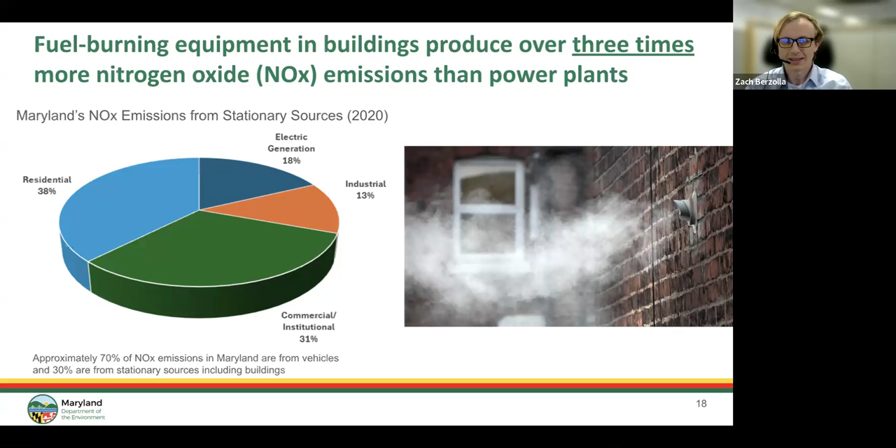NOx and other forms of air pollution from fuel burning equipment harms children and adults in many different ways. There are respiratory issues, wheezing and coughing, shortness of breath, asthma attacks, lung cancer, and other really significant health impacts like premature death, susceptibility to infections, metabolic disorders, preterm births, etc. These are all substantial health impacts, and Maryland is required to reduce criteria pollutants to meet increasingly stringent air quality standards and protect the public's health. This is something we think about a lot every day.

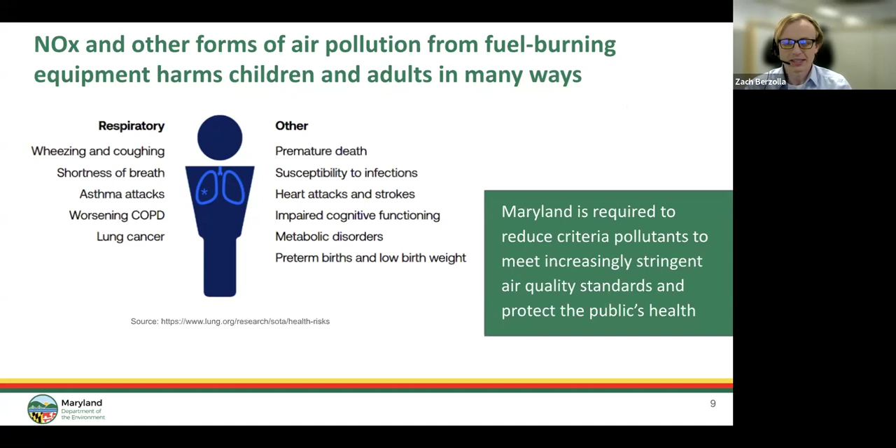This is one of the reasons why Governor Moore issued an executive order last summer requiring the Maryland Department of the Environment to propose the clean heat rules. That said, to propose a zero emissions heating equipment standard regulation that will phase in zero emission standards for heating equipment to reduce carbon pollution and improve air quality inside Maryland's homes and the ambient air, and propose a clean heat standard regulation to expand Maryland's renewable portfolio standard to the thermal energy system, mobilizing investment in clean heat solutions for homes and businesses. The ultimate goal here is to drive investment in clean heat technologies for Maryland buildings to reduce air and climate pollution.

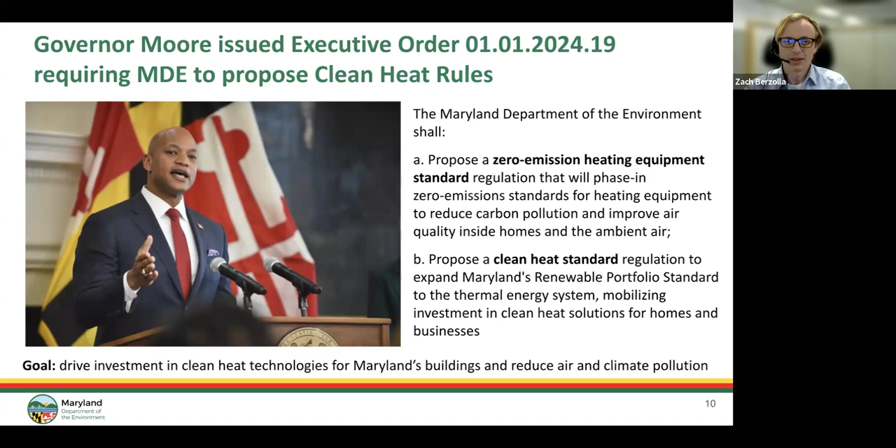I'm going to talk a little bit more about those 2 policies that we're developing right now. The first is the zero emission heating equipment standard. It establishes emissions limits on residential scale space heating and water heating equipment and helps people save money.

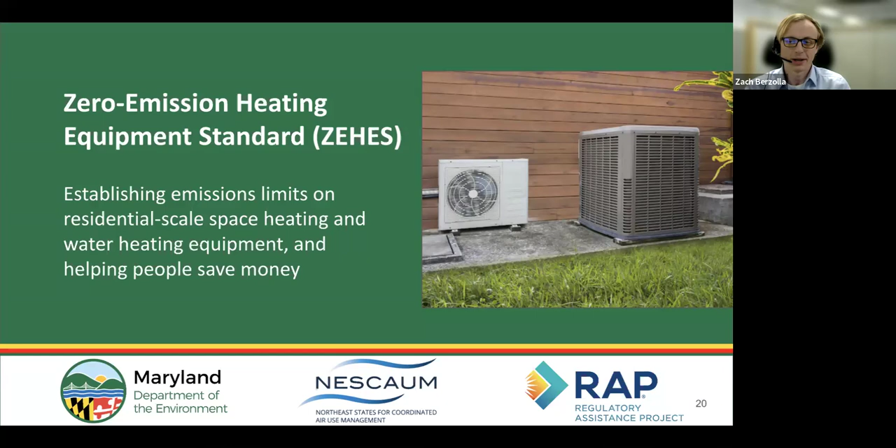ZEHES is really focused—we call it ZEHES—it's furnaces, boilers, and water heaters. The goal here is that almost all newly installed residential scale heating equipment in Maryland would meet zero emission standards beginning in 2029. Ideally, under this program, most new air conditioning units would be heat pumps as soon as possible, because we know in Maryland that's a really easy swap with relatively limited upfront cost changes.

Furnaces and boilers would be gradually replaced with heat pumps, and combustion water heaters would be replaced with heat pump water heaters as they reach the end of their life throughout the 2030s and 2040s. The ZEHES rule is really about end of life replacement. People, homeowners, tenants, businesses, etc. can keep existing furnaces and boilers for backup heating, or running them as long as they want in their existing state.

This is the ultimate goal, but we know there are some implementation challenges. We're taking feedback - I'll share our email at the end if you have feedback or thoughts on this, as we look to find the right balance between where we need to go for our air quality and climate goals, while also ensuring that we reflect the realities on the ground in this kind of regulation.

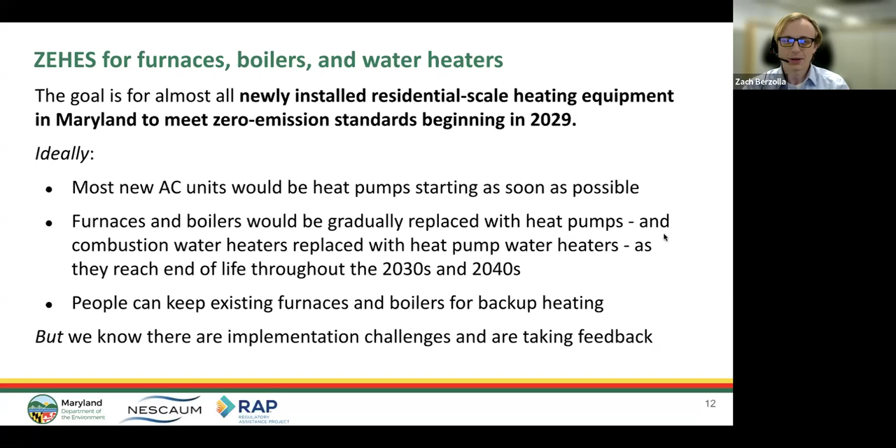If we go to the next slide, I'll also touch on our clean heat standard. The goal is to create additional incentives to help building owners transition to clean heat solutions. For this audience, it's only focused on the heating fuel providers, encouraging them to become clean heat providers by requiring them to help their customers adopt clean heat solutions.

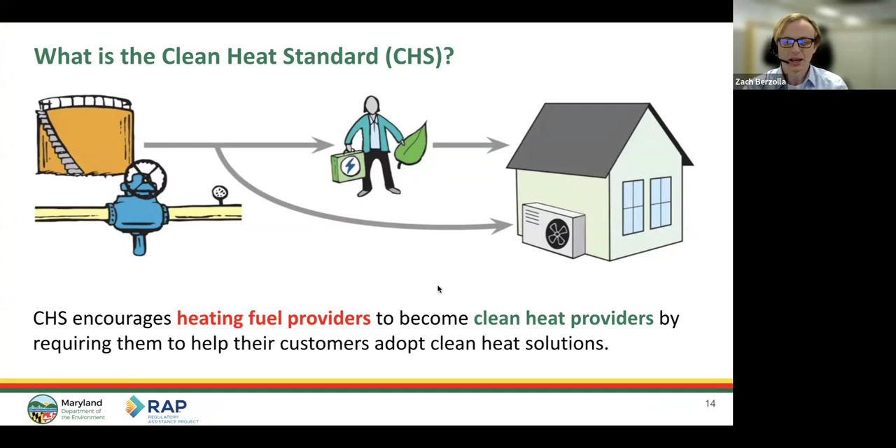And they can do that in many ways. They can help meet their goals by supporting projects like weatherization, air sealing and insulation, the installation of zero emission heating equipment like heat pumps, solar thermal, as well as the delivery of alternative fuels like biofuels and hydrogen.

And for you all, the whole goal here is that contractors who provide clean heat solutions to their customers that they're already interfacing with could earn clean heat credits as well. And those are valuable to heating fuel providers, creating additional incentive for the installation of this equipment, specifically the zero emission heating equipment.

We're generally aligning with the Empower program, if you're familiar with that in Maryland. When we talk about weatherization and zero emission heating equipment, it's meant to stack on top of that. And we're running a working group right now on alternative fuels and how to credit that.

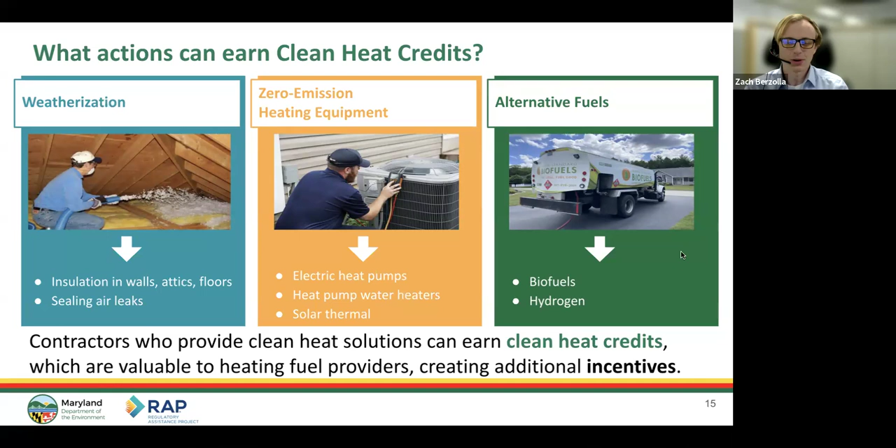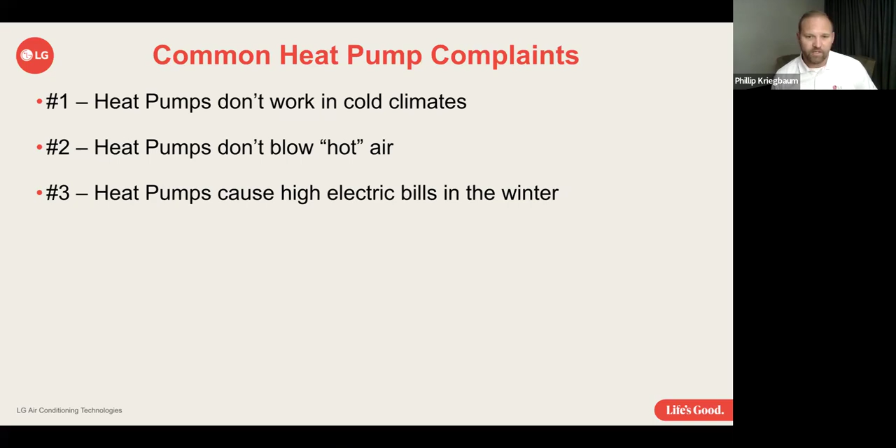And these are truths to some degree, but I want to talk through each one of these and show you how they actually do work in the Maryland market.

So I'm going to use a term called traditional heat pumps. What I'm referring to throughout this presentation are constant speed compressor systems, the systems we've been using for many, many years. They're single stage or two stage compressors, limited to a speed of 60 hertz, and limited in the amount of heat they're able to generate in cold temperatures.

Traditional heat pumps usually produce about a 95-degree discharge heat, and a lot of people find that uncomfortable, especially if they have vents blowing where they would walk through the airstream. They'll find it drafty. So you get a lot of homeowners that push back against heat pumps, particularly if they had one 20, 30, 40 years ago when they were in their infancy, and they'll just tell you, I don't want another heat pump. As contractors, I'm sure you guys have gotten that pushback from homeowners, and it's not the same anymore.

The other problem with traditional heat pumps is the cost of electricity it takes to operate them in the winter. It's not so much the heat pump, it's when the heat pump's not able to do any work anymore that the problem comes in. When a traditional heat pump can't provide enough heat for the home, it turns off the compressor and moves over to electric resistance heat, which has about the worst COP you can get.

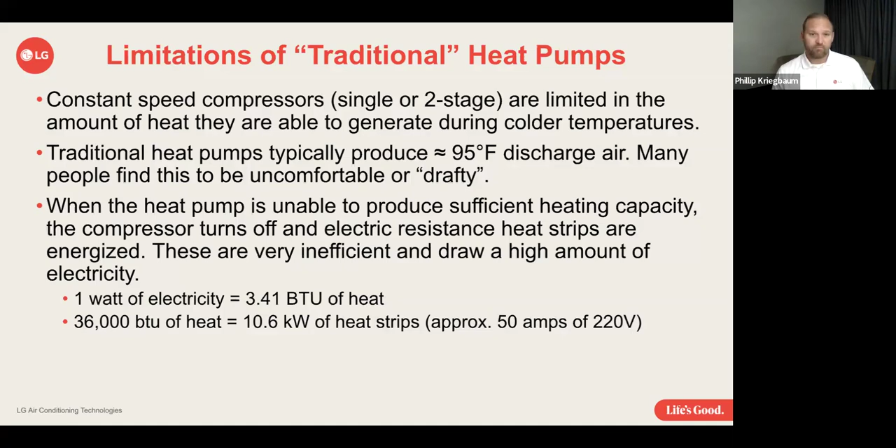So when we're talking to homeowners and they say, I don't want a heat pump, I want a gas furnace, why are they giving us that pushback? I understand there's the whole movement to decarbonization and clean air, but when a homeowner is the one that has to live with it, they may want all that stuff, but if we can't give them a comfortable system that they get to live with each and every day, when it comes down to it, they're really not going to be happy with a heat pump if it's not going to make them comfortable.

So the gas furnace, it doesn't matter how cold it gets outside, that gas furnace is still going to be able to provide the amount of heat that it can provide. Where with a heat pump, the colder it gets, the less heat it's able to produce. Gas furnaces are going to provide supply air of about 120 and up, where a heat pump is only going to provide about 95 degree warm air that people don't always enjoy in their home. And a gas furnace is going to use a minimal amount of electricity, especially in areas where they still have pretty affordable natural gas.

They're going to look at it and go, hey, it's actually going to cost me potentially more to run this heat pump if I switch over. So why would I want to do that? Where the heat pumps, once they stop being able to provide enough heat, they transition over to heat strips, electric resistance heat that are energy hogs. So it's no wonder that a lot of homeowners are still resistant to the heat pump technology.

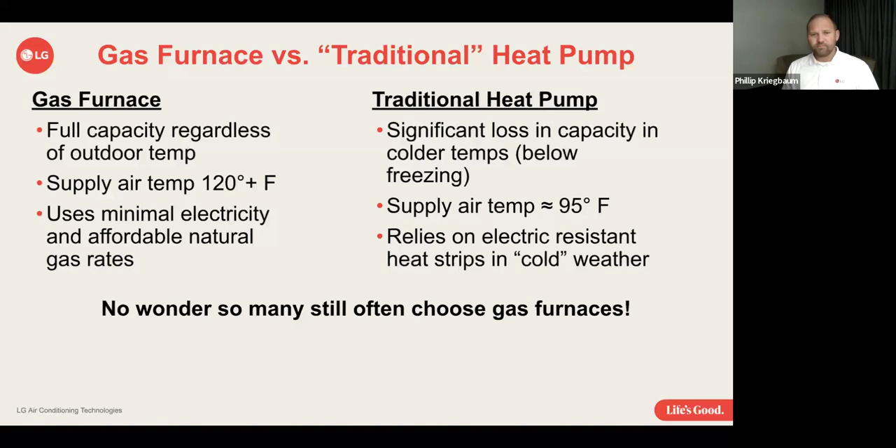Not all heat pumps are created equal. So inverter compressor technology has completely changed the heat pump market. What an inverter compressor is, instead of running on alternating current at 60 hertz, which dictates the speed of about 3,400 RPM, which is what constant speed compressors, all AC compressors, run at. Even your 2-stage compressors, they unload by opening a solenoid, but they still only spin at about 3,500 RPM. And that's their limit when it comes to spinning up to go get that heat in the air when it gets colder.

Well, an LG inverter compressor inverts the AC over to DC. And by having a DC compressor, we can change the hertz, and therefore the speed of the compressor, allowing us to ramp way down when we don't need to produce a lot of heating or cooling, to about 10 hertz, which is about 500-600 RPM, and all the way up to about 8,000 RPM on the high end when it gets cold out. So we can spin that compressor much faster and go get that heat that's in the atmosphere when it's well below 30 degrees.

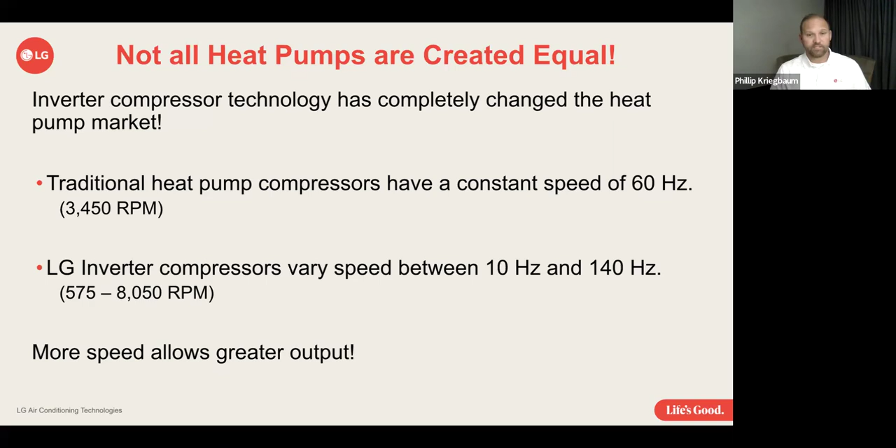I don't know how well you guys can see this graph. What I've graphed here, man, I wish that was clear for you.

The two lines on top, the red line and the black line, are the two LG heat pumps, and these are 3-ton heat pumps. That is the heating output at different outdoor temperatures. Below it are 4 of the biggest brands' base models. And I want to emphasize that I'm not picking on any brands, but these are just the technology, the basic single speed compressors, 2-stage compressors. If you notice, all 4 of them track almost identical to each other, because that's just what is capable of being put out by a heat pump. Essentially what you're seeing there is at 47 degrees outdoor, and these are 3-ton systems, they can produce about 35,000 BTUs of heat.

When you get to 17 degrees, which is around the design temp for a lot of Maryland—Maryland ranges from a design temp of 8 degrees all the way up to 20 degrees, depending where at you are in the state—when you get to 17 degrees, those things are only putting out about 21,000 BTUs. Well, that's potentially not enough. And then when you get even colder, they really drop off. So one there, and what I did is I marked the highest of the 4. At 5 degrees, it's giving you 17,000 BTU. And all that data comes straight from the AHRI.

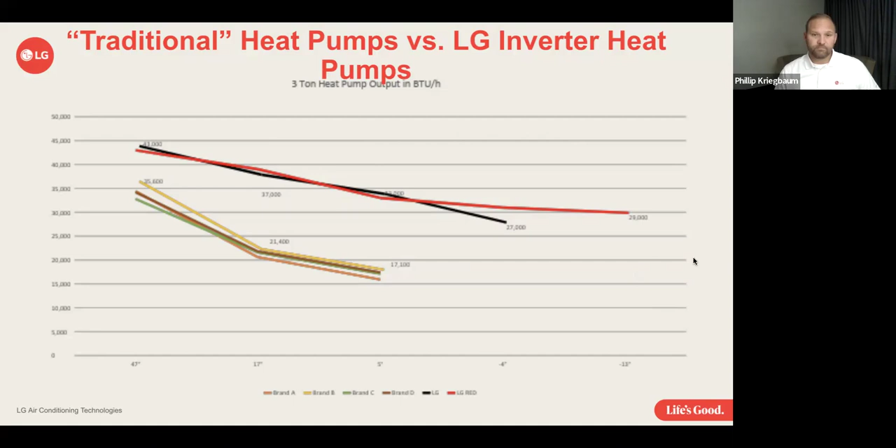All right, so we've got the LG inverter heat pump, our red model, which is reliable to extreme degrees. That's our cold climate model, which again, may or may not be needed in Maryland. It all depends on the application. You're going to have some times where that cold climate model is the best one to go with, and other times that you don't need to spend the extra money to provide that.

So LG heat pump, 100% rated capacity at 5 degrees. Traditional heat pump, like we talked about, below 30, 35 degrees, you really start to see a significant loss in capacity. Supply air temps from an inverter, LG inverter system, 125 up to 135 degrees potentially. And so what you're going to see is the colder it gets out and the more work it needs to do, the hotter the temperatures are that are going to be coming out of that register to keep the house and the home at the temperature that you desire.

With the traditional heat pump, again, we talked about 95 degrees, and that's why people aren't very comfortable with it. The LG inverter heat pump only uses resistance heat strips to supplement the compressor output.

This is a huge point that I can't stress enough. So like we talked about before, with the traditional heat pump, it turns off the compressor and turns on an entire bank of heat strips that have to heat the home. With LG, what we're doing is we're using a much smaller heat strip to supplement on top of what the compressor is doing. So if the compressor is able to get you 90% of the heat that you need, we only have to turn on a little bit of heat strips to get over that hump to get the rest of the heating that we need. And that's a huge saver on the energy bill.

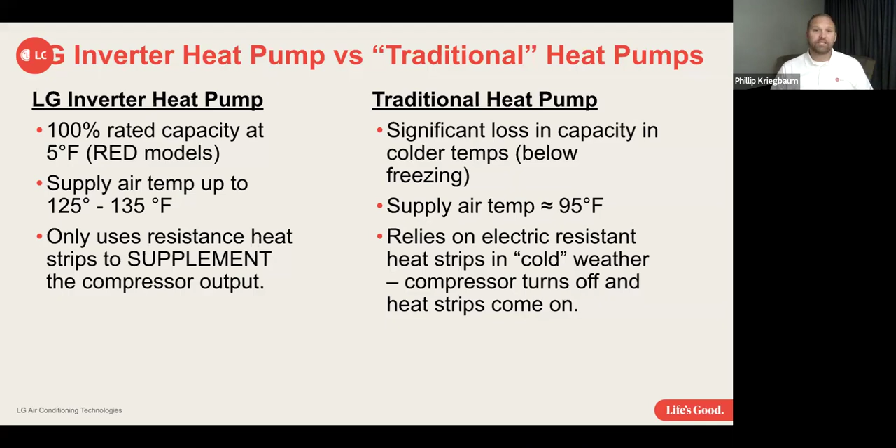Next slide. I put together a couple of examples of that, just real world examples. Sorry, my formatting didn't line up right there, so hopefully you guys can track with the stuff there on the bottom.

So here's an example. In Maryland, I used outside temperature of 17 degrees based on a load calc.

And I want to stop because every time I see the word load calc and I'm talking to contractors, I get on a little bit of a soapbox and start my little lecture. But if you're not doing load calcs, if you're not doing manual J load calcs, it is impossible to be successful with heat pumps. It's impossible. There's no way to know how to size it. If you're using 400, 500 square foot per ton, there's no way to know if you're going to get enough heat. You're going to oversize or you're going to undersize, and you're going to be in trouble either way. So you have to do a load calc. There is great software out there on the market. I've been a contractor. I've done a load calc at every single home that I've been at. So no excuses. Go get the software, take the time, be better than everybody else, and do your load calcs the right way.

Okay, so this house requires 38,000 BTUs of heat based on our manual J load calculation, and we're going to install a 3-ton heat pump. So if we were to use a traditional heat pump, at 17 degrees, when it starts getting cold out, when we get to that design temp, we're going to get nothing out of the compressor, right? Because it's already turned off because it can't keep up anymore. It's going to need 12.5 kW heat strips. Well, it needs 11.1, so we're going to install a 12.5 because that's the next size up. And what that is, that's going to have a 62 amp draw. You're going to have 57 coming from the heat strips, and about 5 amps for the fan motor to blow.

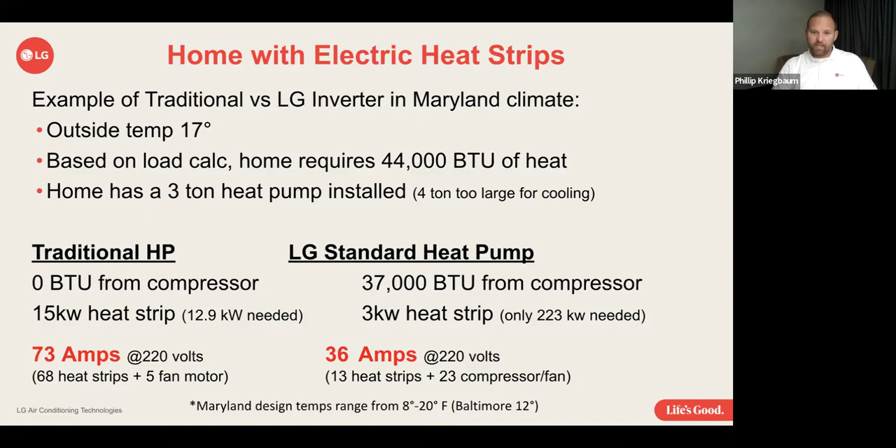Why 3-ton and not 4-ton? Because maybe the 4-ton would be much too large in the summer. We have Manual S requirements that don't allow us to oversize on the cooling side, which is a mistake that a lot of contractors make. They're like, well, I'll just design for my heating and throw Manual S out the window. And next thing you know, they're 50, 60% oversized on their cooling. And that's not good either.

So if we have this scenario at 17 degrees with that traditional heat pump, you're going to get nothing out of the compressor. It's done, it's turned off. It said, hey, I can't keep up anymore, we need the backup team. So they're going to go to the backup, or the emergency, whatever you want to call those heat strips that are installed there. You need 12.9 kWs to put out 44,000 BTUs of heat, so that's a 15 kW strip. That plus the fan motor is going to give you 73 amps of power requirement to heat that home.

With an LG system at 17 degrees, and this is our standard system - I didn't use the cold climate one in this example - at 17 degrees you're going to get 37,000 BTUs out of the compressor. We need, I think that's supposed to be 2.3 kW needed, so we're going to add a 3 kW heat strip. Look at that, a 3 kW instead of a 15 kW heat strip.

3 kW. So when that heat strip plus the compressor plus the fan is running in the coldest part of the night, we're going to draw 36 amps instead of 73 amps. So even when we're using heat strips, there's a massive amount of savings. And again, those strips are only going to come on when that house needs more than 37,000 BTUs. So not only is the heat strip draw much lower, the amount of hours per year that those heat strips are actually going to be activated is tremendously less than with a traditional heat pump.

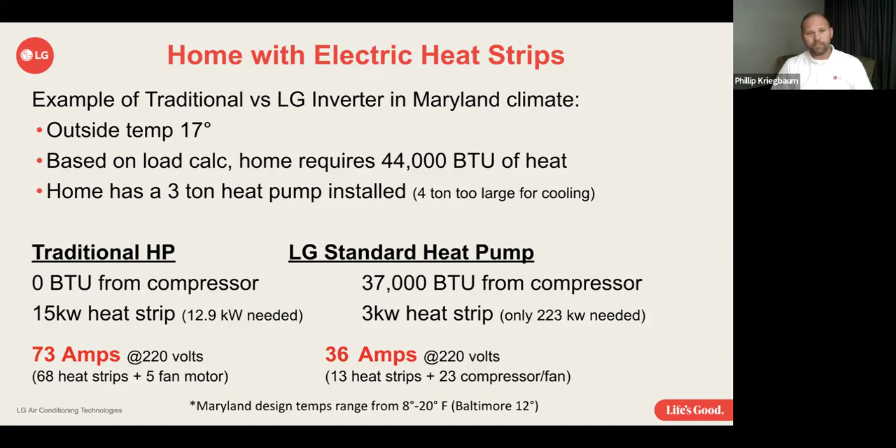Right, so like we talked about, inverter compressor technology completely revolutionized the modern heat pump. When you go to your supplier, your distributor, and say hey I need a heat pump, there's lots of different choices. There's still what I would call traditional heat pumps out there, and they're still being incentivized to some degree. And I think we need to do a lot of work to define what heat pumps we want to offer.

And I think a lot of that needs to be at the performance in those colder climates, to make sure that we're not throwing in a heat pump that we have to back up with a large bank of electrical strips, because that doesn't really get us to where we want to be, and it's not the technology that's going to move us forward in the market. So there's a lot of confusion out there, both for homeowners and contractors, when you say heat pump, because some heat pumps are fantastic and some heat pumps, frankly, aren't. And both are available, so we need to have that deeper conversation of what do you mean by a heat pump, what are you defining as a heat pump?

There are criteria for what defines a cold climate heat pump. As you can see, I showed you both of LG's - I showed you our standard and I showed you our cold climate. Both of them are still very different than the traditional single speed compressor heat pumps that we get from lots and lots of other manufacturers. So just have that conversation, have that awareness, understand that there is a difference. When you hear the phrase heat pump, pause for a second and make sure we're talking about the same type of heat pump.

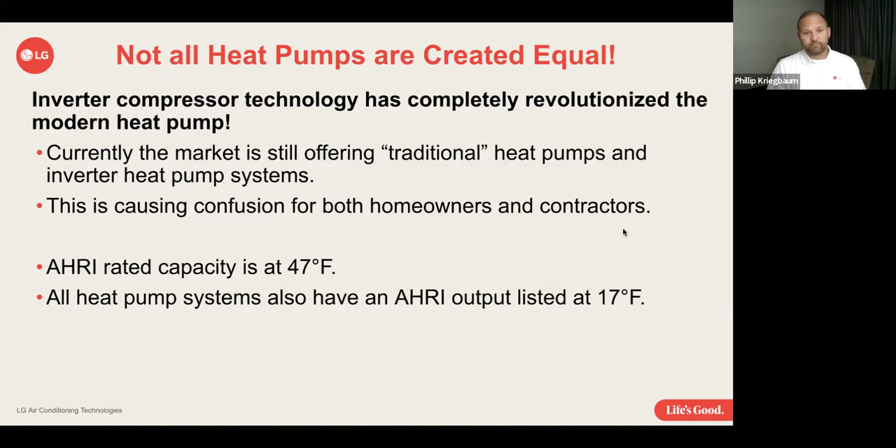So from a contractor standpoint, I get a lot of pushback sometimes, and some of it is fear of the unknown, fear of change. It's different. The inverter systems look funny, right? They don't blow out the top. They look like a suitcase and blow out the side, and they've got all these computer boards in them, so I'm a little bit scared of them. And I get that.

But the change is not as big as you think it is, right? The refrigeration cycle has not changed, just how we look at it. Can we go back one slide real quick?

So what has changed is that we're no longer using mechanical devices to control the refrigerant flow, right? In a traditional air conditioner heat pump, we've got a compressor that's constantly spinning, pushing the refrigerant, and then it goes to a TXV that opens and closes based on the coil temperature, letting the refrigerant into the coil as needed.

And we've moved from doing that to an electronic version of that. Now we've got sensors and computers monitoring temperatures at different points throughout the system, using an electronic expansion valve along with a variable speed compressor to send exactly the amount of refrigerant that we need to the indoor coil to create the temperature that we need.

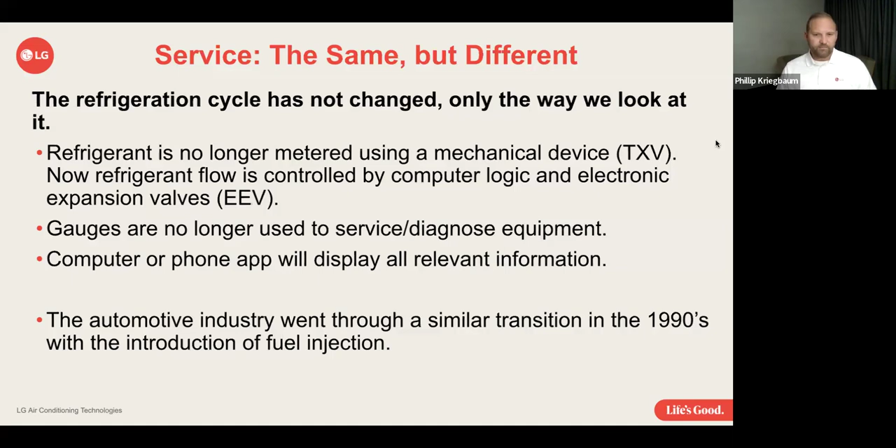Just to drive the point home, the old way, mechanical gauges, whether they're digital or analog, doesn't matter. They're still just looking at the pressures of the high side and the low side.

So it's just how we look at the data that's different. The skill set that we have as contractors hasn't changed. We still need to understand how a system works. It's just we look at it in a different way. So everybody's like, okay, I want to learn more. Next slide, please.

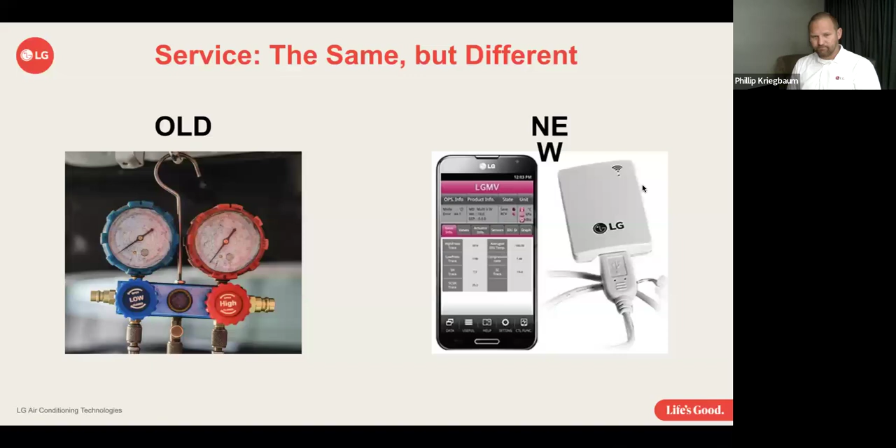But we also have some partner academies with our local distribution company. Thomas Somerville is our distributor in the area. They have 2 academies, and it's the same training that you'll get from LG. So if you want to come to LG, great. If you want to go see Thomas Somerville, fantastic, you're going to go through the exact same program. Their trainers have been to the LG training and have been certified by LG. They have one location in Chantilly, Virginia, and another one coming very soon in Seaford, Delaware. So those are going to be some local opportunities.

And obviously Thomas Somerville, if you're looking for equipment, I'd love to get you connected with those guys over there. Great people, but they can help you with the training, the support, anything that you need, warranty parts, and obviously new equipment for new jobs. It's going to go through Thomas Somerville locally for the Maryland people. Next slide.

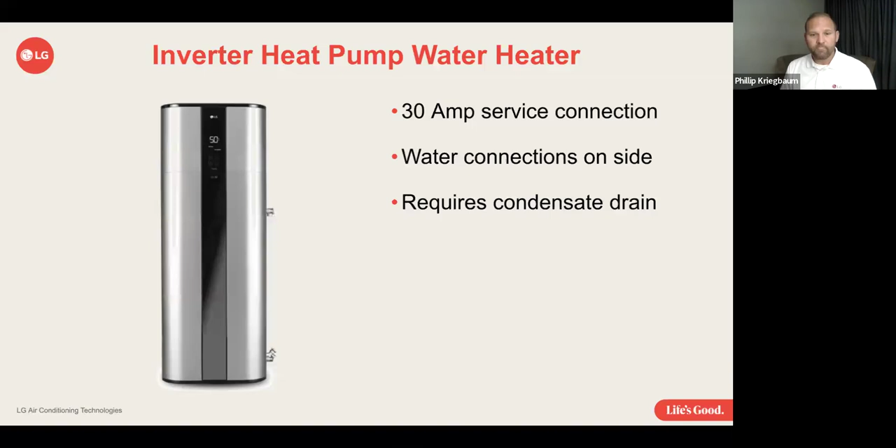So, hey, Andy, I just saw you pop up on the chat. How you doing, buddy? Yeah, so I think we're ready for questions for myself and Zach and Becky. So guys, thanks, I appreciate it.

Thanks, Phil, really good, really informative, learned a lot. We're going to start with our questions. Our first is from Daniel. If we have a heat pump with a DOE rated capacity of 32,000 BTU at 17 degrees Fahrenheit and a maximum capacity of 39,000 BTU at 17 degrees Fahrenheit, what can we promise customers?

Can you read that again? Because those numbers didn't track in my head. I'm sorry, hang on, being edited. Put it in the chat. All right, let me pull the chat up. Sorry.